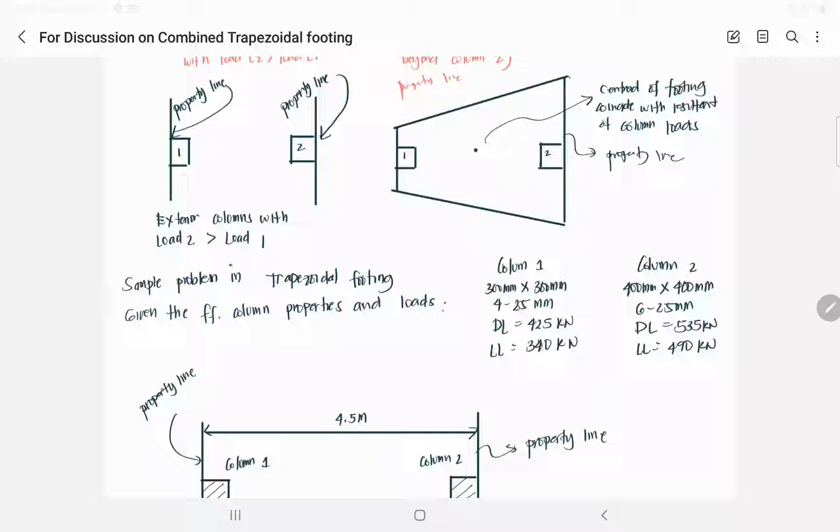This is Engineer Atilano, and today I will discuss a sample problem in trapezoidal combined footing.

Before going to that problem, just a quick recap on combined footing. Combined footings support more than one column, and this happens when the columns are close together so that the isolated or individual footings would run into each other.

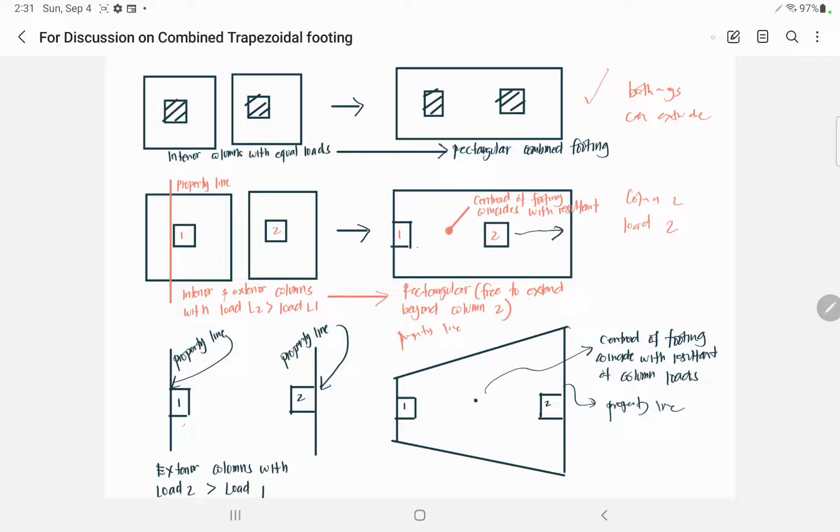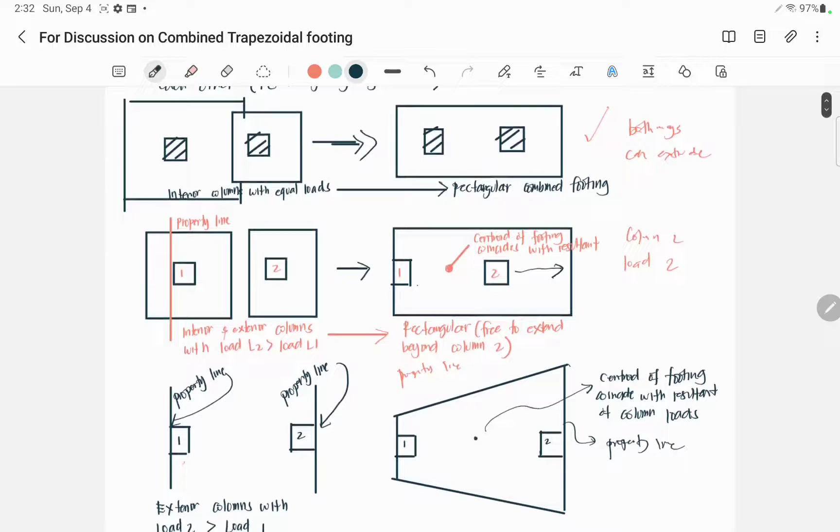For example, if you have two isolated footings and based on the design the distance between them is so close that they intersect each other, you can proceed into a rectangular combined footing. Another instance where rectangular footing is used is when this column design already causes the footings to intersect, so we can create a rectangular combined footing.

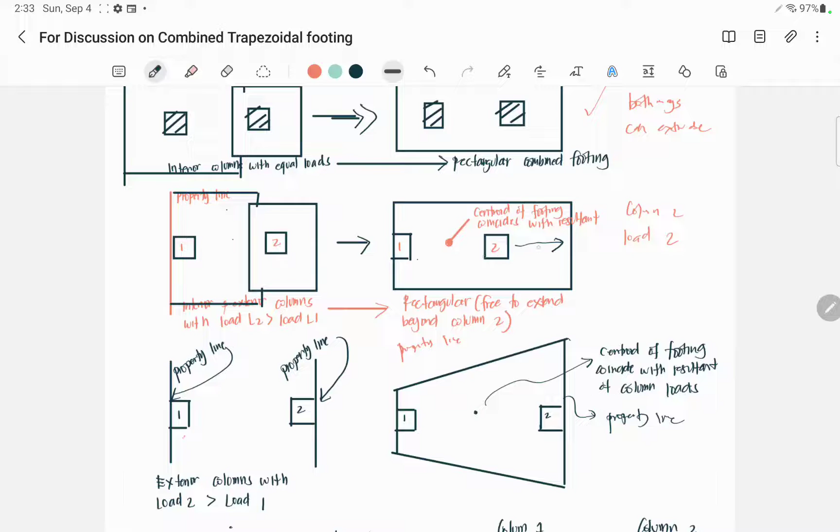There is also another scenario where the column is just beside the property line. In this case, you assume that they overlap, so again you need to combine it. But since in column 1 you cannot extend, you will just extend the area in column 2.

The last scenario is where the two columns are within the property line, and the assumption is that column load 2 is greater than column load 1, so it's concluded that the footing in column 2 is larger than in column 1. If you are provided with a property line, you cannot extend in that direction, so what you can do is extend in the other direction. That's why the most appropriate section will be the trapezoidal combined footing, with load 2 greater than load 1.

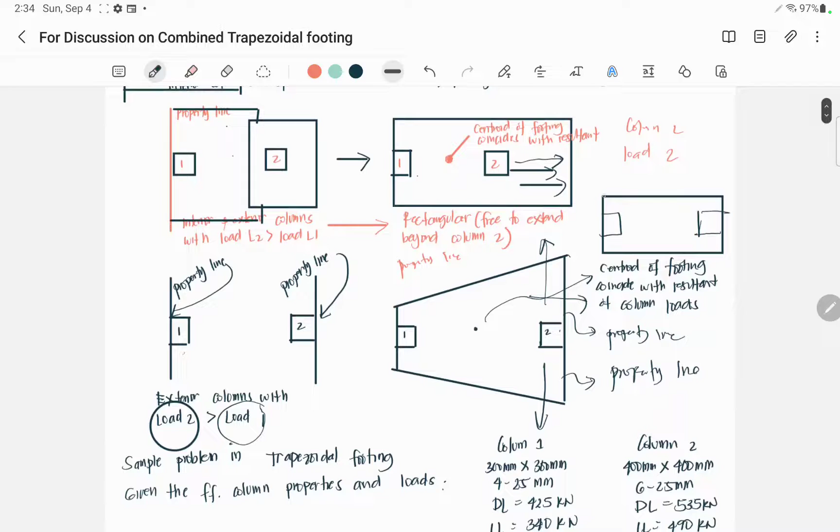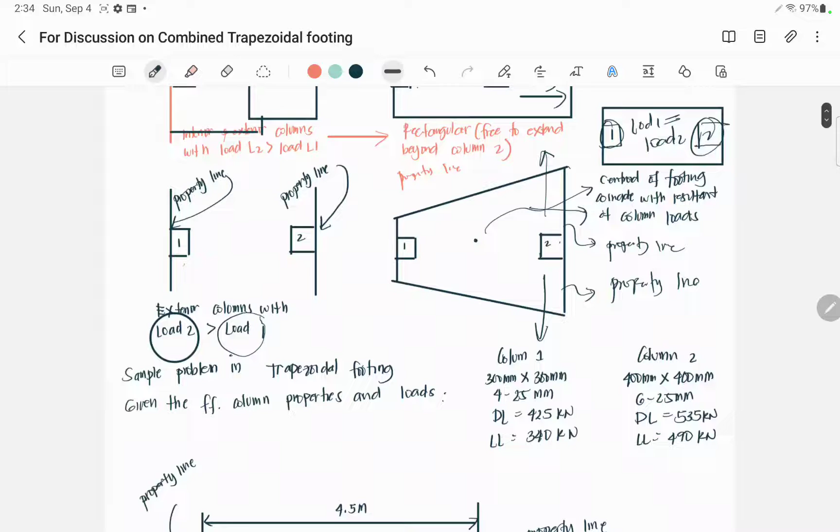Sir, what if load 1 and load 2 are equal? If that happens, it will be a rectangular combined footing. So you have the column, you have the column, when load 1 is equal to load 2. But in this other case, load 2 is greater than load 1. So if load 1 is greater than load 2, it's the reverse of the drawing, it will look like this.

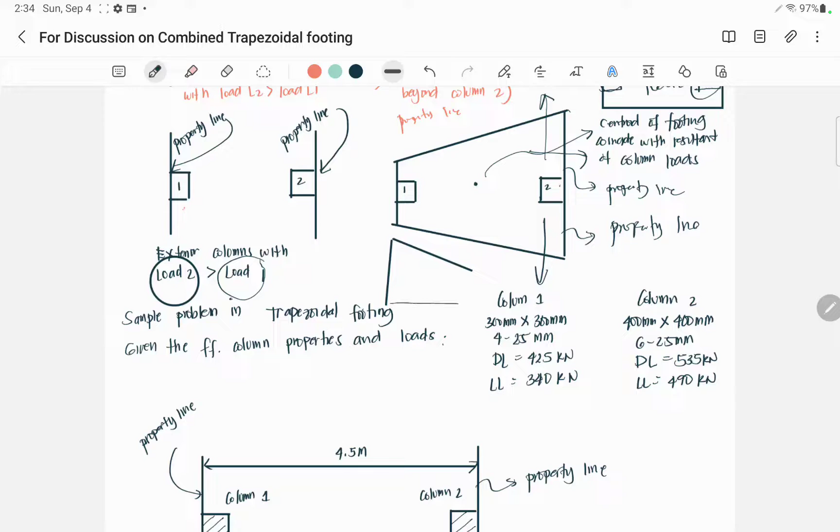Okay, let's try to solve this problem. It is assumed that the two columns are located within the property line, and we can say that column 2 has a load greater than column 1. So 535 and 425, there is a difference of 110 kilonewton, which is very big.

There is also a 150 kilonewton difference in the live load. So we will design it in such a way that we identify the section and the reinforcement both for the top and bottom section. The problem here is to design a suitable trapezoidal shape footing, with Fc prime of 21 megapascal, Fy of 414 megapascal, and the effective soil pressure already given.

QE means you will not determine it. Based on our previous problem, we have QA, the allowable, and you need to deduct the pressure coming from the soil and from the concrete, but now it's effective. Use 20 mm main bars and 16 mm temperature bars with Fy as 275, and we already have the value of D, which is 680 mm.

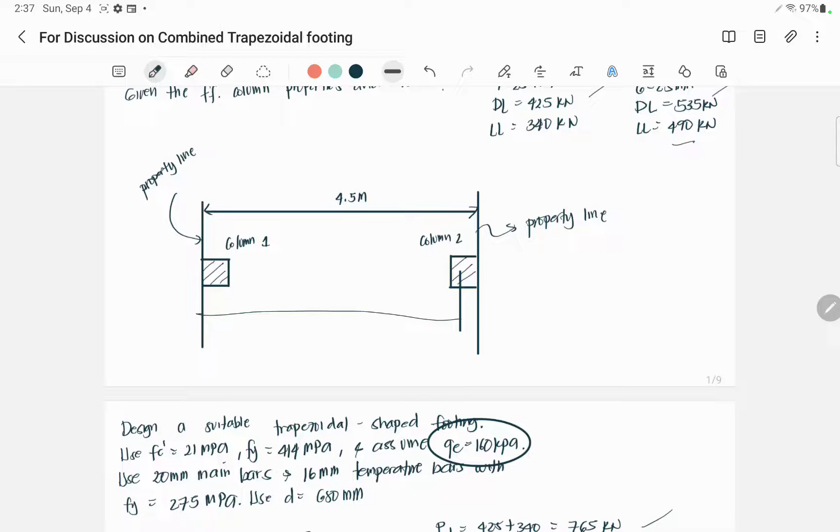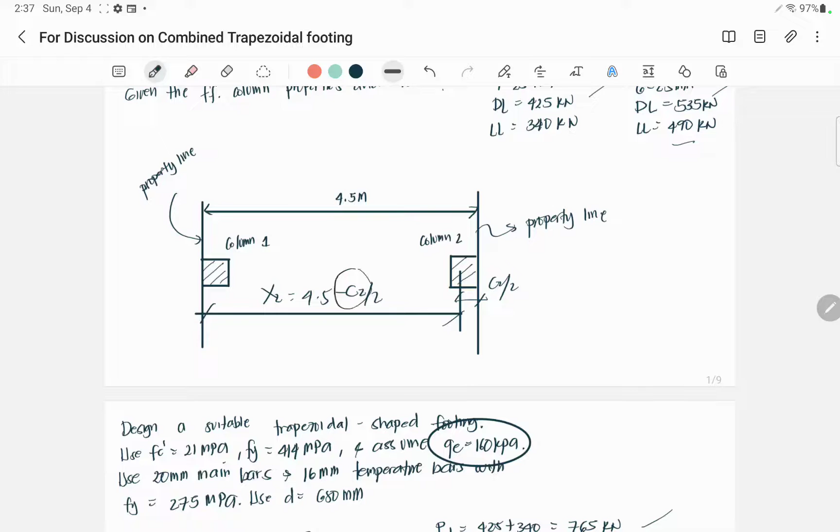Then P2 is the service load at P2, so we just add to get 1025. And X2 is this one, which is 4.5 minus half of C2 divided by 2, where column is 0.4. So X2 will be 4.5 minus 0.4/2, which is 0.2, giving 4.3.

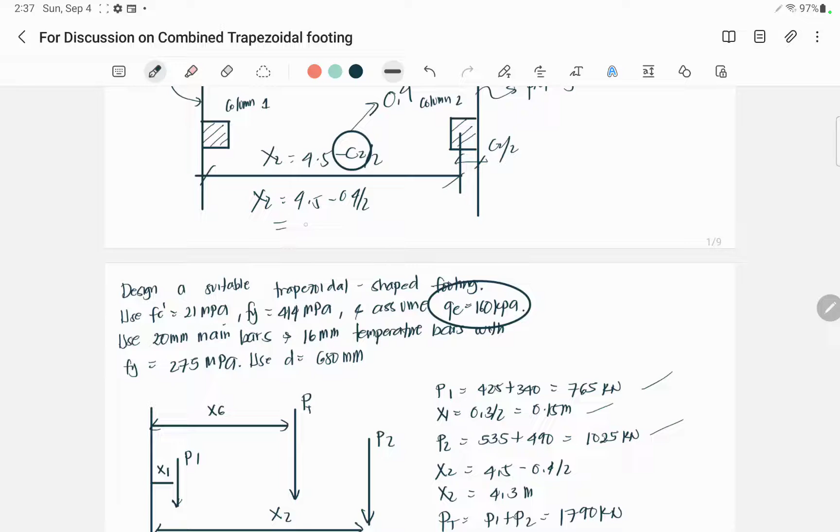Okay, so correct, 4.3. Then we add the total, which is 1790, and based on the figure, the area of footing is 1/2 (A plus B) times L, which L is 4.5. We will use that area to come up with the section or dimension of A and B.

Your value of PT will be multiplied with the XG, so we are utilizing Varignon's theorem. Your XG, or the location of the centroid of the footing, is 2.526 from the left property line. This XG will be used to determine the area.

By the way, we have the area of footing. So P service over QE, QE is given, so 1790, the total, divided by QE, gives you 11.1875 square meters. So this is the area of the trapezoid. You have here two unknowns, two equations.

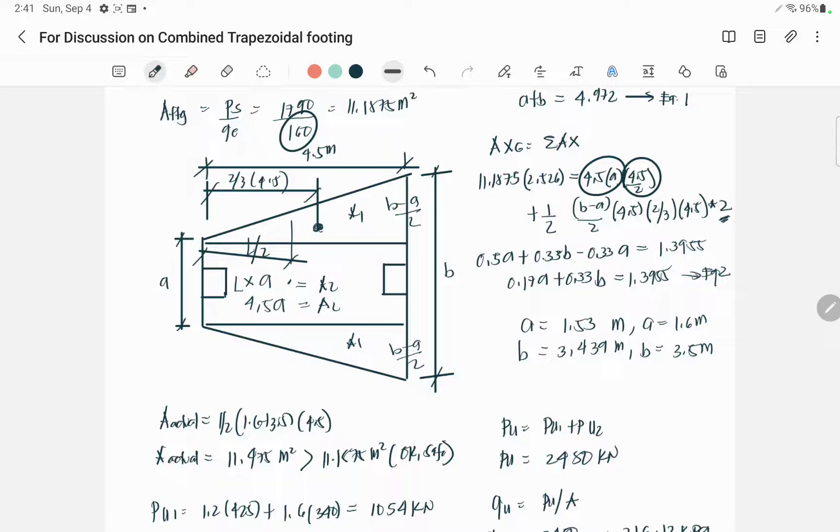Assume that this is the centroid, 2/3 of 4.5. That will give you 2/3 times 4.5, multiplied by 2 because you have area 2 and area 1. Then using algebra, you have the simplified equation 2, which is 0.17a plus 0.33b equals 1.3955.

We equate this equation 2 to equation 1. From that, we have A which is 1.53, so we can say A is 1.6 and B is 3.439, which is 3.5 meters.

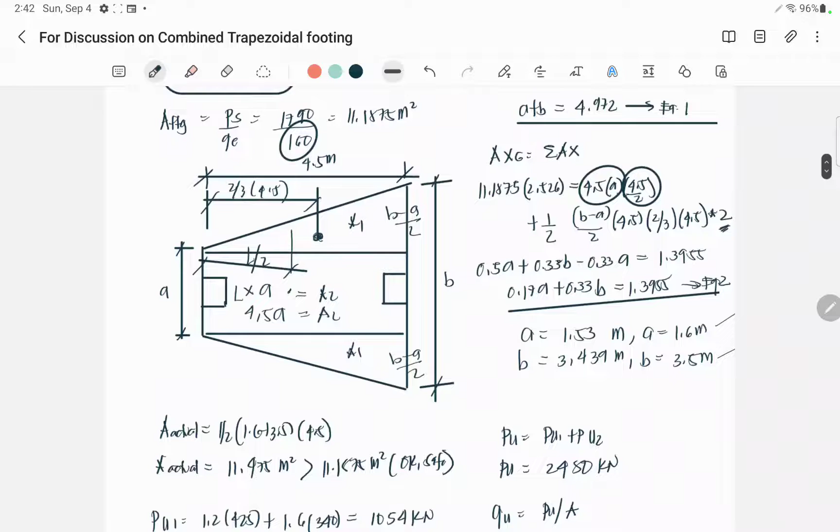Now, based on the design section, you can calculate whether you are above, based on the computed one, whether the new section is adequate. Since area of footing is 11.1875, based on the new dimension of A and B, we should be greater than 11.1875. So, accordingly, 1/2 times (A plus B) times L is 11.475, and we are greater than 11.1875 square meters. So, we are safe.

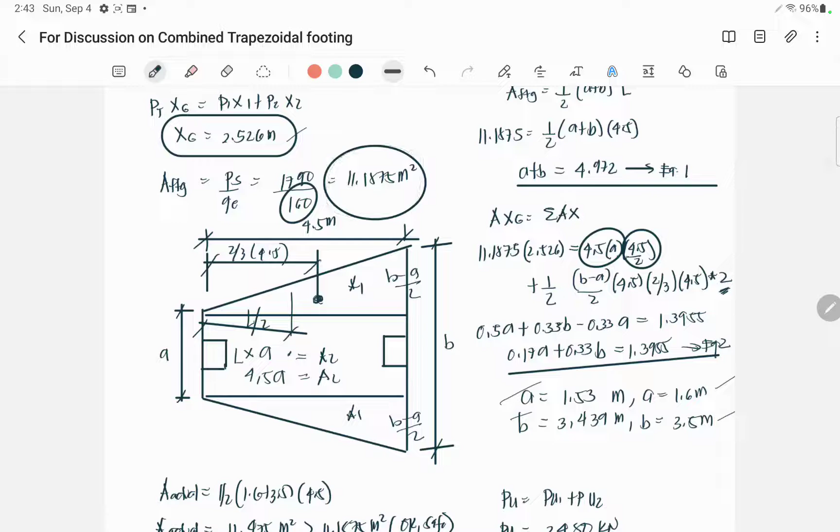So after determining the section and comparing to the required, the required is 11.1875 square meters, and we are above that based on the calculated one. We can now proceed with the uniform distributed load to determine the shear and moment.

First you determine PU1, the ultimate, it's 1054, PU2 is 1426. Then we add, it's 2480 kilonewton, and we divide by the area, which is 11.475. So you have the ultimate pressure, which is 216.12 kPa.

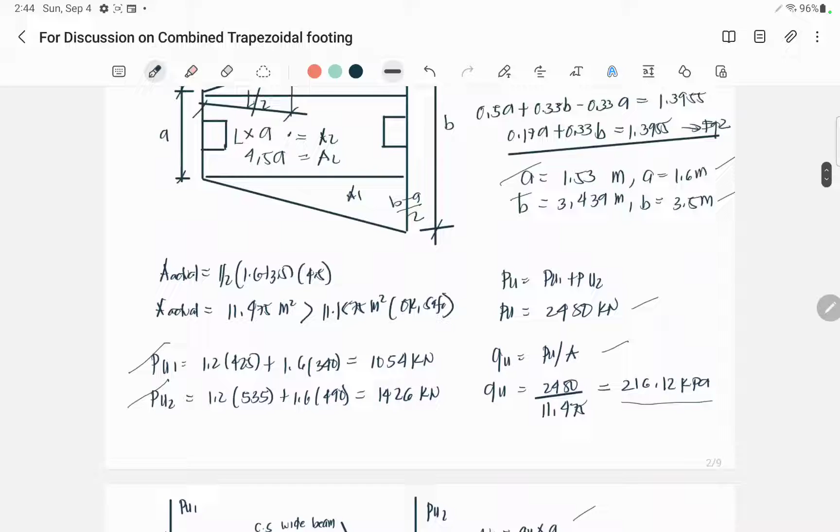Then that is the pressure. So to determine the distributed load in terms of kilonewton per meter at column 1, we multiply by the value of A, to make it a unit of kilonewton per meter. So it becomes 345.79 kilonewton per meter.

And for the uniform load at column 2, we multiply by the value of B. It becomes 756.42 kilonewton per meter. So, accordingly, we have now the pressure diagram, omega 1 and omega 2.

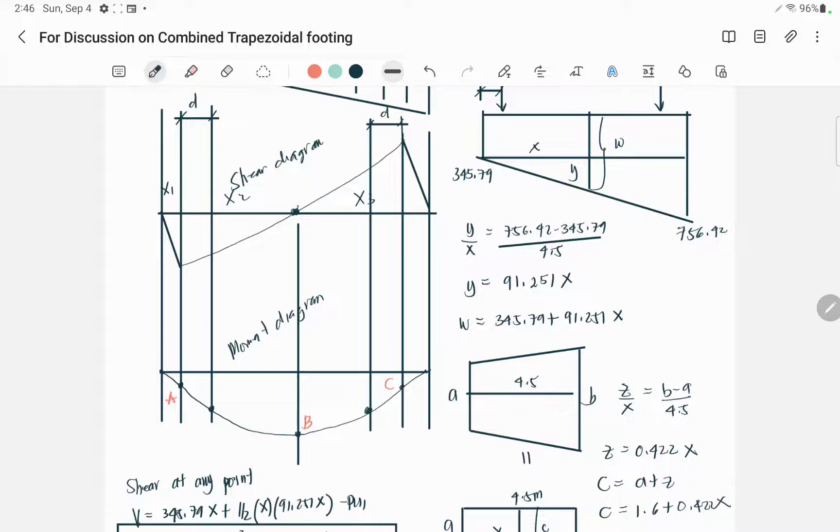Okay, and also this one, this is the point of inflection, wherein you get the first derivative of the moment and equate to 0 to determine the point of inflection. Okay, so what we will do now is create a certain shear and moment equation.

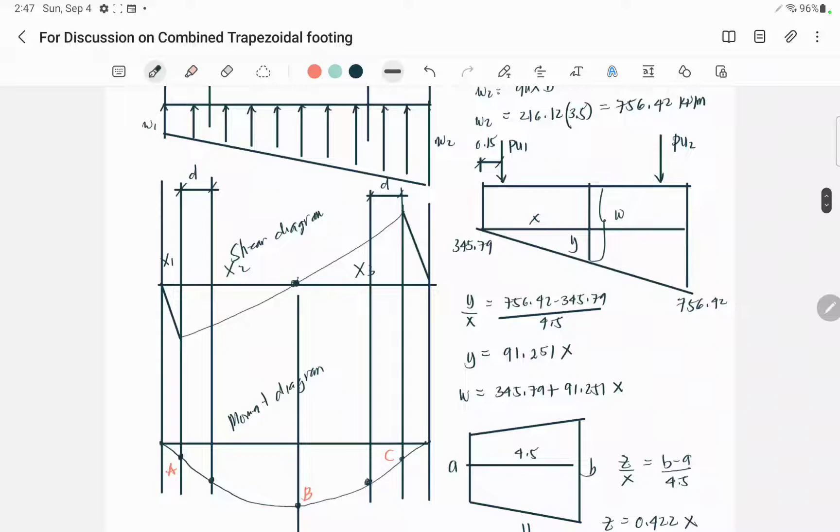So to determine that, the procedure I have done is I cut a certain section to create the equation. So this is w1, right? This is w2. You have PU1, you have PU2.

So let's say this is w, right? So this w is actually the value of 345.79 plus the value of y. So actually, when you cut at that section, that will be the equivalent of w. And to get the value of y, it's a ratio and proportion.

So y over x is equal to the difference of 756 and 345 divided by the length, which is 4.5. So this one is actually the total length L. So y is 91.251x. Therefore your w is 345.79 plus 91.251x. Okay? So now your shear at any point.

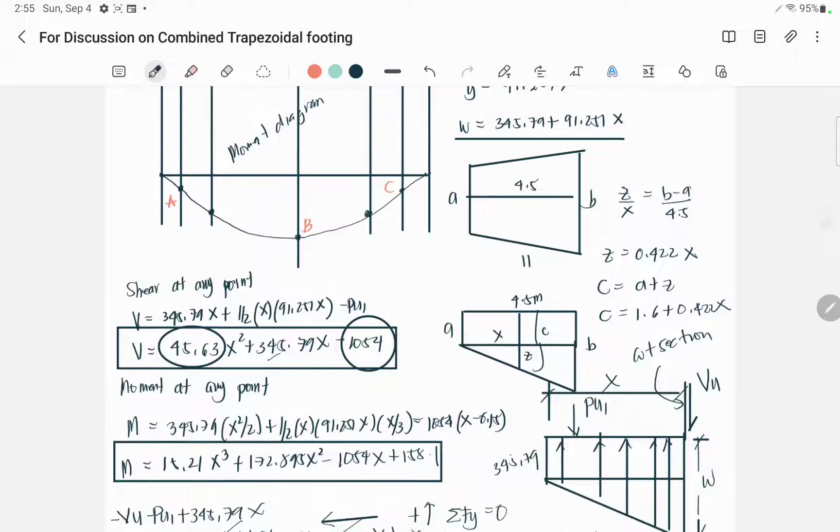What else? How about the moment at any point? So this is already our shear at any point, and this equation will be used to draw the diagram. But of course, I just draw it directly because I already knew the drawing. If you are familiar with the problem, you can draw it directly, but if you do not know the value, the configuration alone, you can imagine it.

Then how about for MU? It's the same procedure, same as cut section. But this time, you will take summation of moment at this point.

Okay, so I don't have space to write anymore, so I will just erase this one for the moment diagram. For the moment equation, I will erase. Where is the eraser? So, the same.

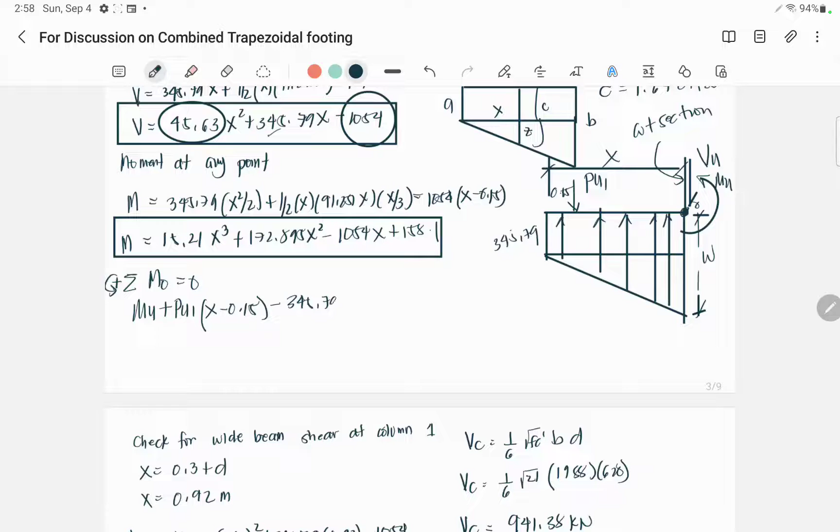MU, it's the same. So MU, summation of moment at, let's say, point O, is 0, and this direction will be positive. So MU plus PU1 times, this is 0.15, right, X minus 0.15, then minus

345.79 times x, times the distance x over 2, minus 1/2 times x times this one, which is already 91.251, right? So 1/2 x times 91.251x times the centroid. What is the centroid? X, 1/3 of x, is equal to 0.

So your MU now will become 345.79 x squared over 2 plus 1/2 x times 91.251 x squared over 3 minus 1054 times x minus 0.15. Okay, and of course you simplify it and this will be the value. So 15.21, diba? So can I solve again? Baka nagkamali ako.

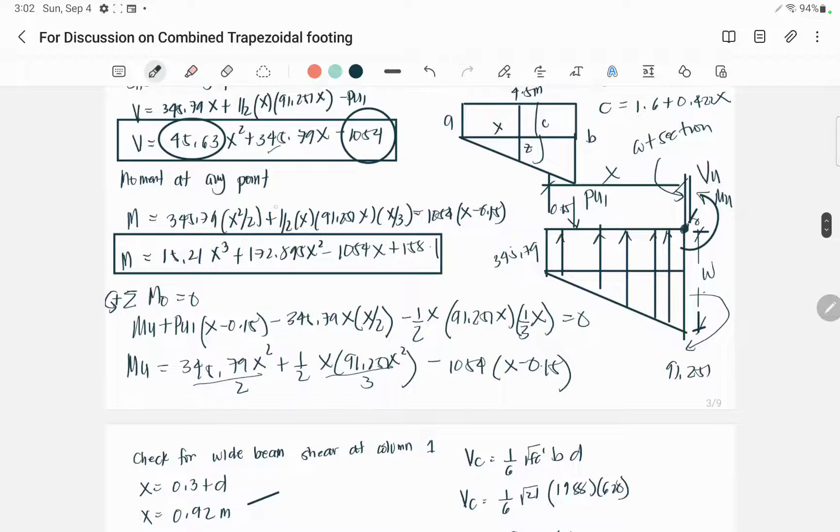That's why it's 0.3 plus D, so X is 0.92. So to determine the value of shear, the critical section for shear, we all knew that this location is 0.3 plus D, which is 0.92. So we will put this 0.92 in our shear equation, which will give us negative 697.252.

By the way, this shear signifies only the direction, no? So we can compare, we will do the absolute value. This is already the actual, and this VC is the capacity. Since VC, which is 941.38, is greater than 697, we are okay, and the value of D is safe for wide beam shear at column 1.

How about check for beam shear at column 2? For the location of this one, we all know that the total length is 4.5, then deduct the value of D and C2. So it will become 4.5 minus D minus C2, which is 0.4. So the value of X will be 4.5 minus C2 minus D, which is 3.48.

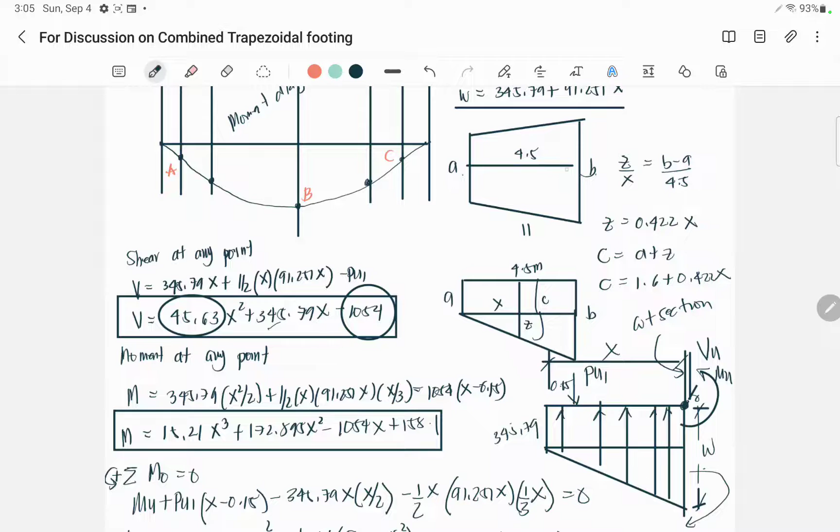Originally the section is A, B, and 4.5. This is the same if we extend this big downward, and we make it straight at the upper part. From this section, that's why I put equals here to become like this. And of course the value of C is A plus Z. A plus Z, and Z is 0.422 times X.

The same is true for this one, no? So 1.6 plus 0.422 times X. X is 0.92, you substitute this one with this one. So it becomes 1.988.

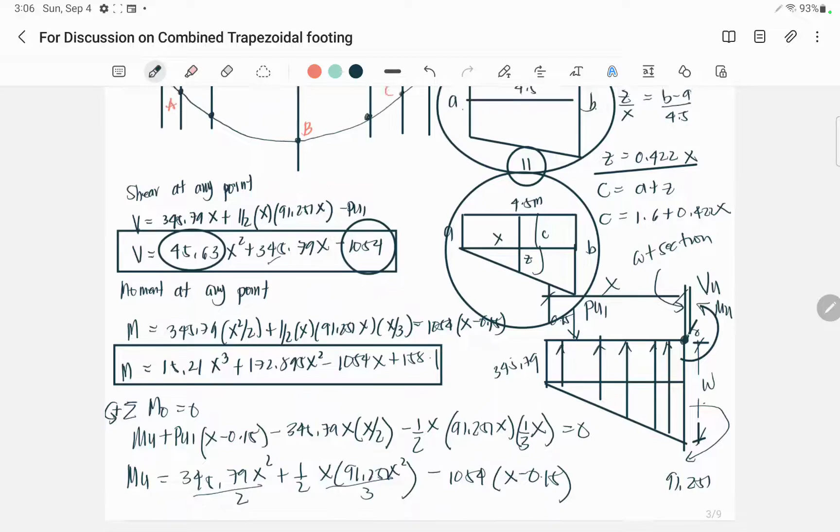Why are we calculating that value of C? This value of C will become the value of B in the calculation. Because the formula VC is 1/6 square root of FC prime, times D. So the value of width at that X section, because we try to create a certain equation, that value of C, 1.6 plus 0.422, will become the width B.

This is top view, ah. Okay sir, we are just a little bit confused. Okay lang naman, okay?

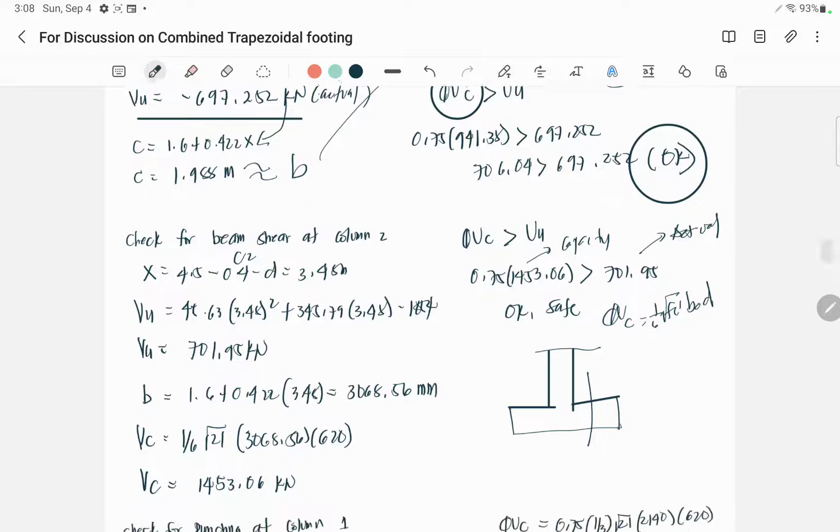So remember, no? When we are designing a shear, for example, isolated footing. When we determine the value of shear, the formula of Vc is 1/6 square root of FC prime, Bo, D. So we have, if this is the bar, so this is the D, and this is the value of B. That is the value of B.

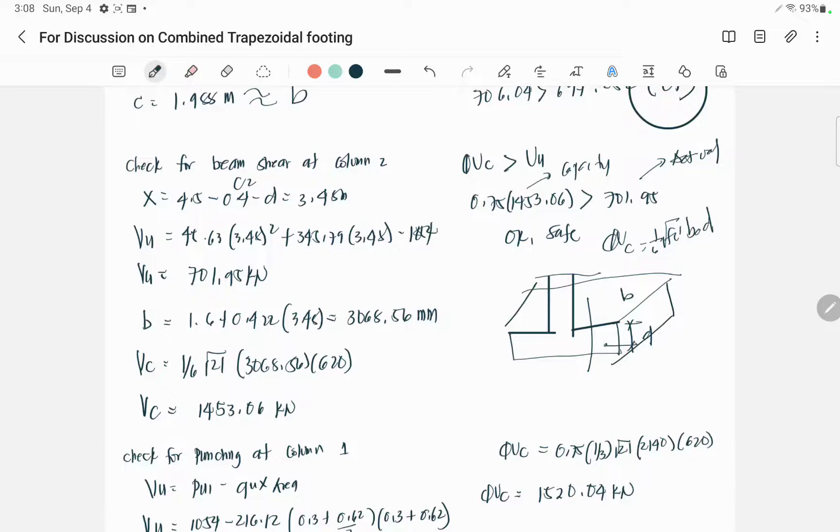Now we have a trapezoid, and this is the value of B, Bo. And this is the value of A, this is the value of B. How to determine this Bo? Instead of this one, we convert the drawing into like this. This is A, this is B. We are on the top view, on the top view.

So this Bo is actually located at X distance. And this Bo, in my computation, I put it at C. Right? Siya yung C. So actually, this is the value of C. But we convert into this one so that we can determine easily the value of C. And C is actually A plus Z, where Z, by using ratio and proportion, is 0.422x. Okay? We are on the top view, diba? We are on the top view.

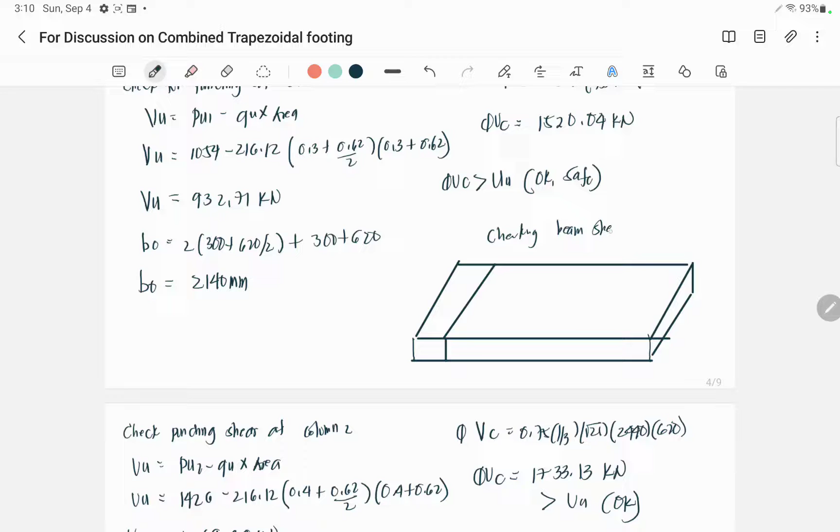The value of Vc is 1/6 square root of FC prime times BO times D. This is BO, and this is the value of D. Okay? In the same manner...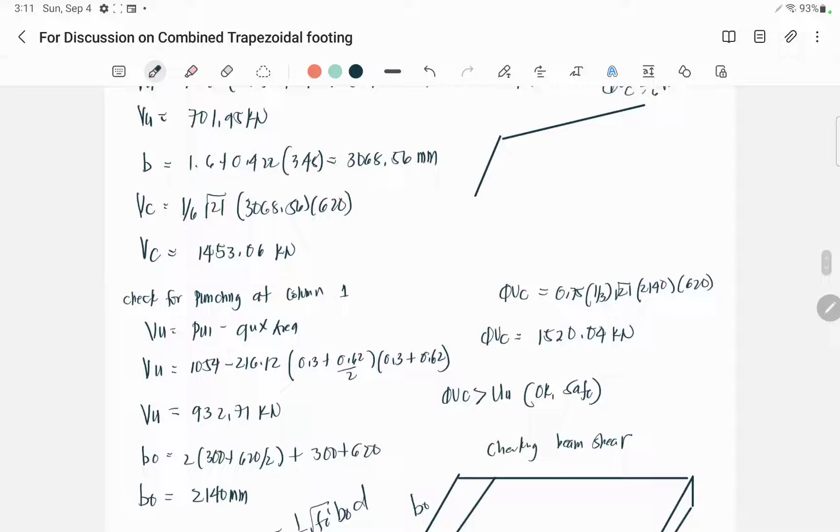If you have the trapezoidal, right, we want to determine this value of BO. Right? And this is the value of D.

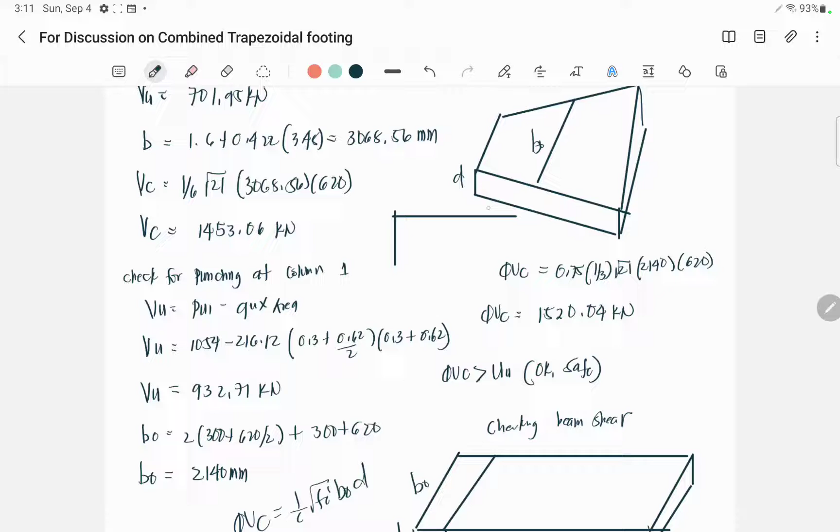So, instead of doing that one, we convert the drawing into like that. So, this is the value of B, or this is equal to BO. Okay?

So, which is this one, B. B is X plus, B is A plus Z. This is A plus Z, where Z is 0.422X. Okay? I hope you understand that one, no?

If you're still confused, we can have the discussion on that. So, we already determined the value of B, and we are safe for the beam shear. Now, check for punching shear at column 1.

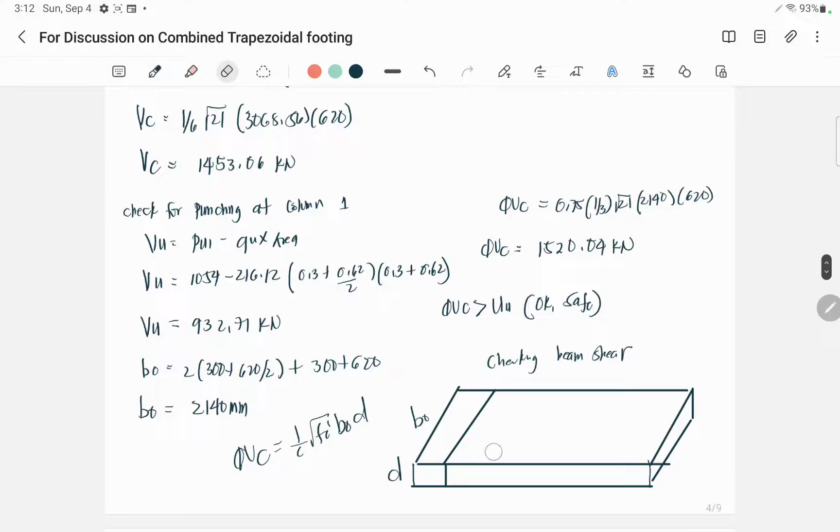Check punching at column 1. So, for punching, it's PU1 minus QU times the area. I don't have the drawing. Okay. So, where is that?

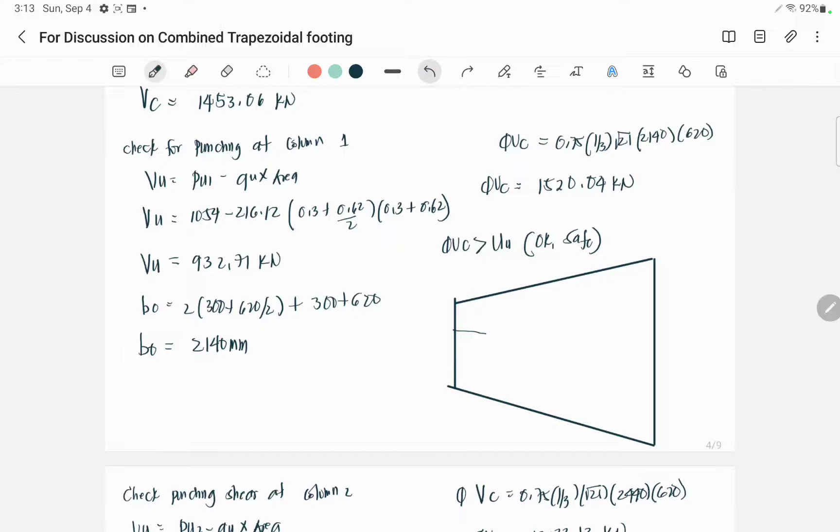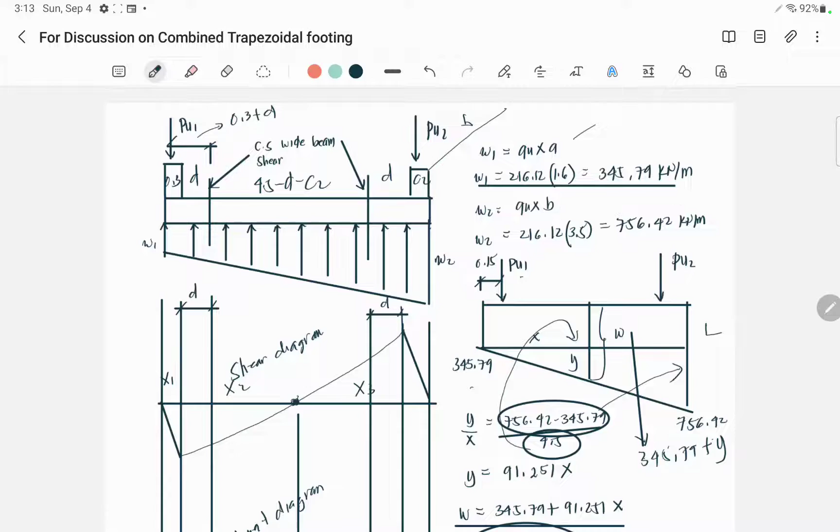So QU is, we have the value of QU here, right? 216.12. Where is 216.12? Wait. Yeah, the value of the QU is 216.12 kPa. So it is expressed in pressure.

So we need to multiply that one with the area, no? With the area. So remember, our area here is this... D over 2.

That's why your net area will be the total area, which is, if this is C, it will be C plus D over 2 multiplied by C plus D over 2 plus D over 2 minus the column C times C.

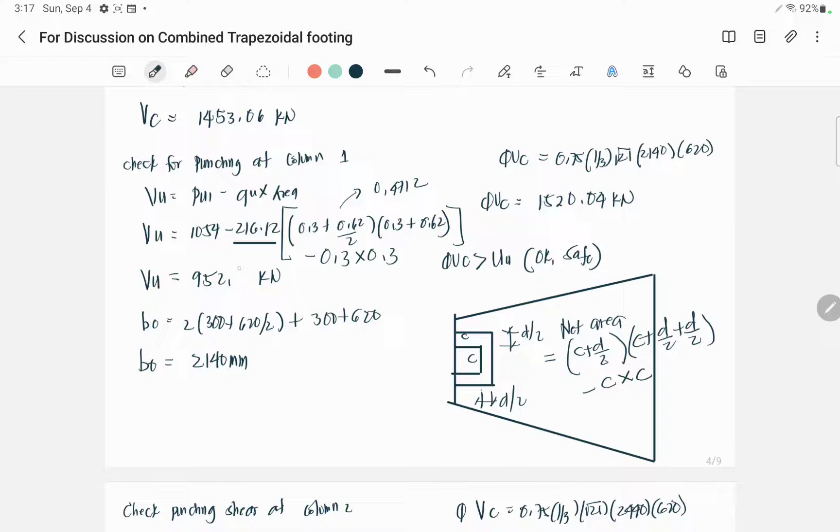Okay, and we check the value of phi VC. So phi VC is 1/3 square root of FC prime times BO times D. Okay, but this BO is the perimeter of the punching, right? The same with all the columns that we design.

So your BO is actually 2 times C plus D over 2, plus D plus C over 2 plus C over 2, right? So 2 times this side. This is C plus D over 2, 2 times, plus D over 2, sorry, D over 2 plus C plus D over 2. So BO is...

2140, and of course we substitute. Our phi VC is 1520. This is our capacity, which is greater than the actual. Okay, so the value of D is safe for punching at column 1.

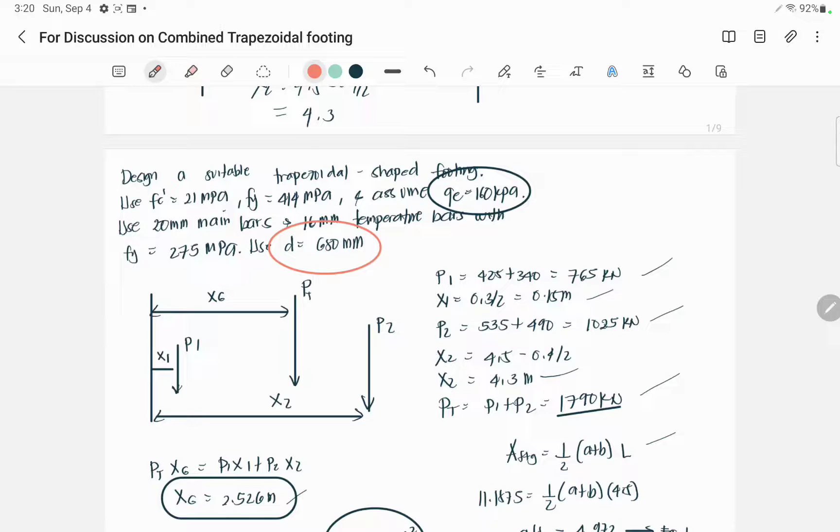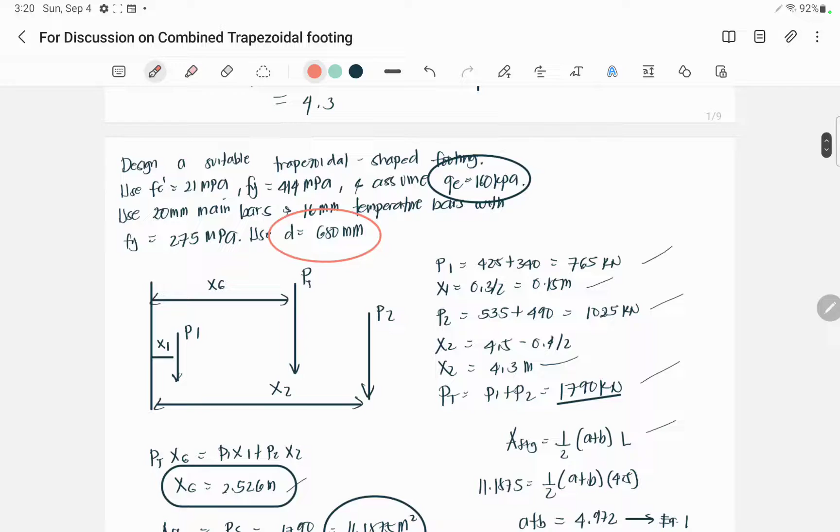So the value of D provided based on the given, this one is safe for both the one way, for both beam shear and for the punching shear. Okay, so what if it did not pass? So we can increase the value of D. Okay, so now we are ready for the reinforcement.

So the longitudinal reinforcement, so yeah, we have now the MU2, the MU1, MU2, and you have the Mmax or the maximum. So where is that? So you have here MU1, no? Then you have also MU2. Actually, where is MU1? This is...

MU1, eh. MU1, yan. Then, sorry guys, ha.

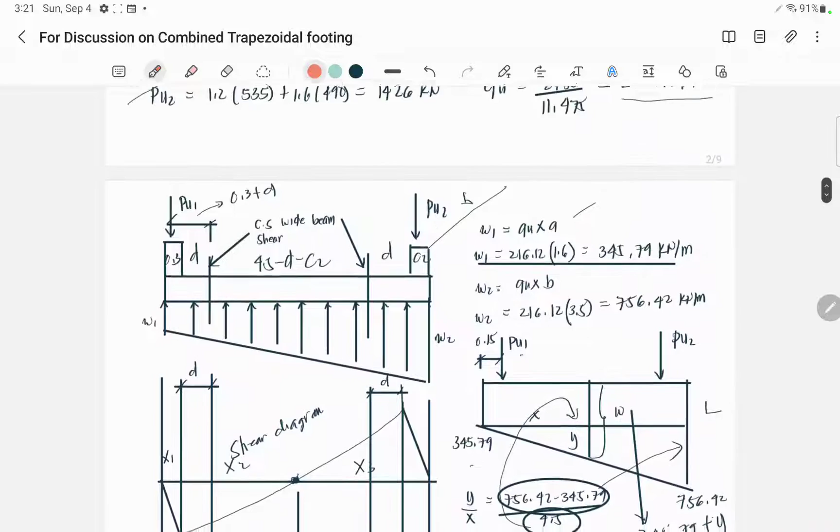MU2 is located here. MU2 is 4.5 minus 0.4, where 4.5 is the whole length minus 0.4. So this is your MU2, and this is the Mmax.

Based on the figure, based on the moment diagram, all the moments are negative, which means the requirement of the bar is top bar only, because it's negative moment. But in the bottom bar, as I mentioned before, we will use the minimum reinforcement. That is the additional.

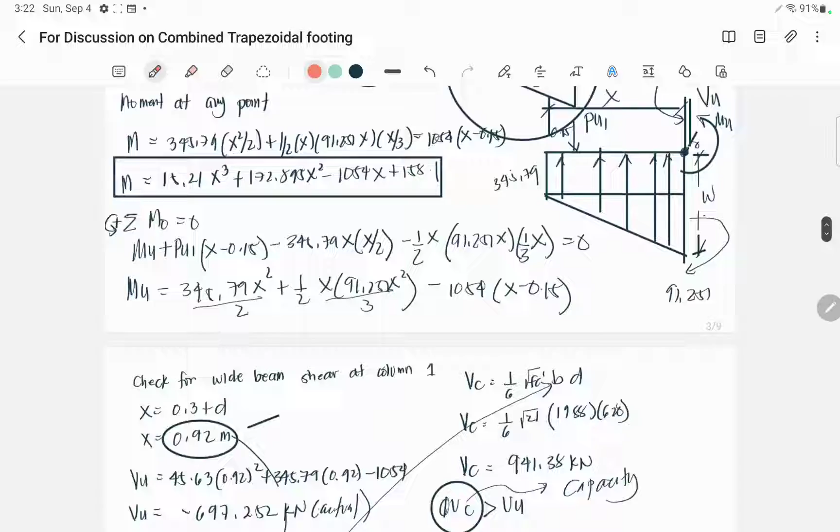So we already have the moment MU1, MU2, and the maximum moment. How did I get the maximum moment? The maximum moment is the point of zero shear. So we have the moment and shear equations.

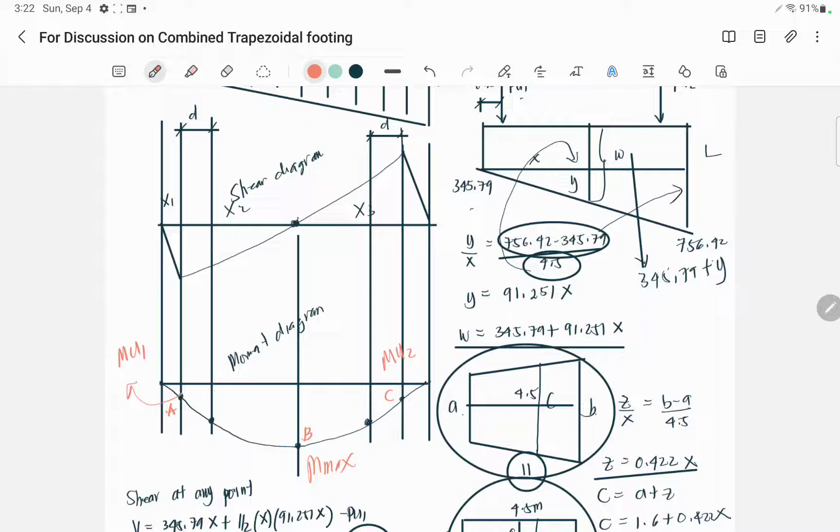So we put 0 in the shear equation to determine the location of that point. When we let the point of zero shear determine the maximum moment, we get the point of zero shear, which is found to be 2.33.

Putting that 2.33 into the moment equation, you get 1166.69, negative, which means the bar that you will put on that section will be the top bar.

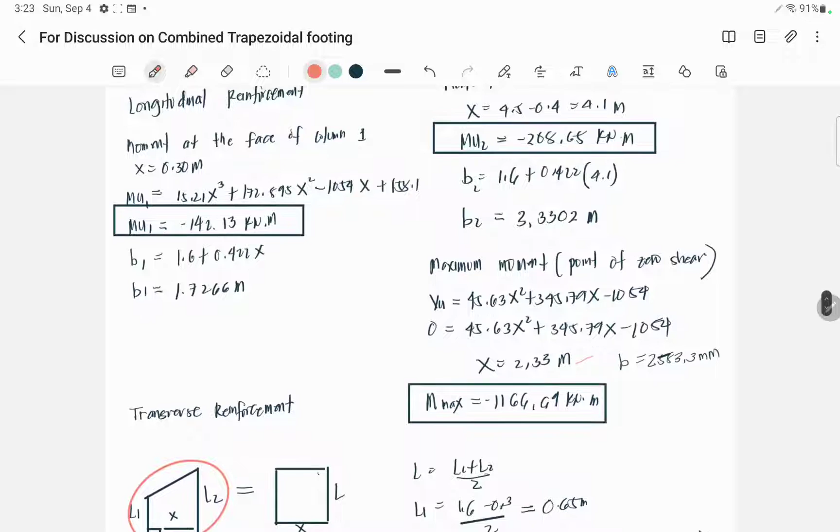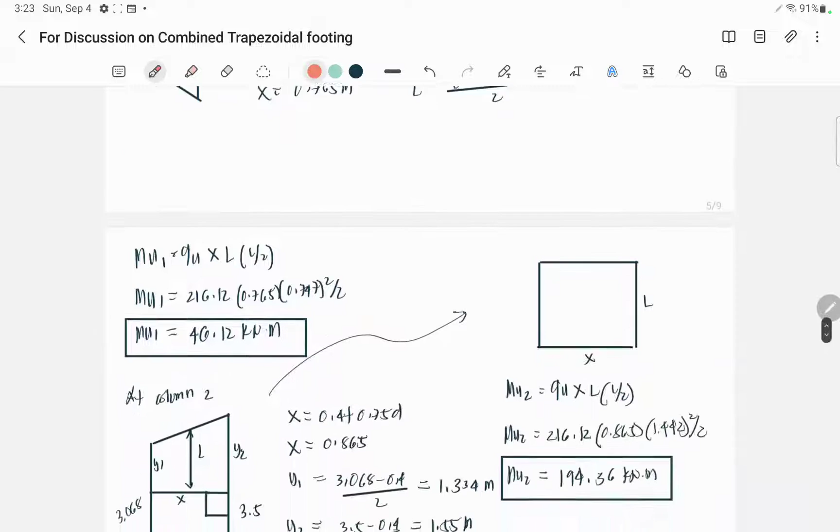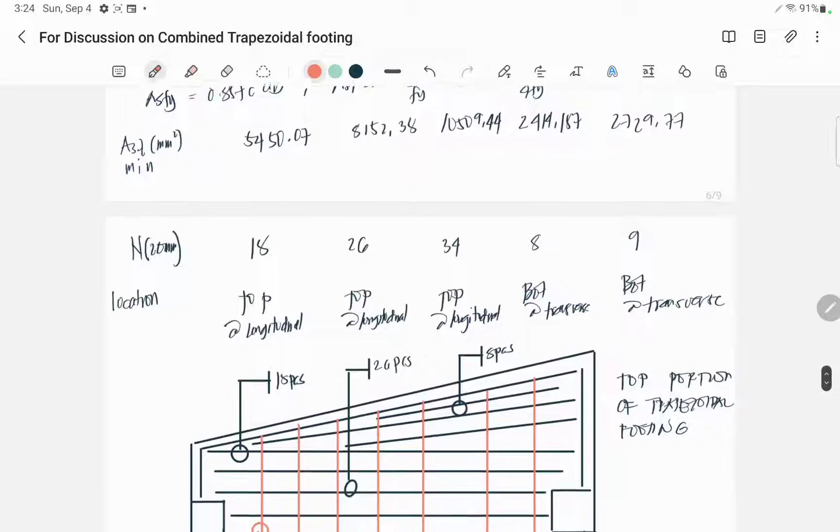So we are done with MU1, MU2, and the maximum moment. Now, for the transverse reinforcement, we will determine this bar. The same is true with this one. Ideally, if you're already familiarized with the design, so if you already imagine what you are doing...

If this is the section... wait, make it bigger. If you already imagine what you are doing, since it is negative moment, the bar requirement is here. This is the bar requirement now.

Considering the longitudinal section, what we will put here is minimum only. In other words, this is the required top bar because of the negative moment. Based on the figure also, it did not mention that we should put the bottom bars, but for the minimum requirement, we will put area minimum here.

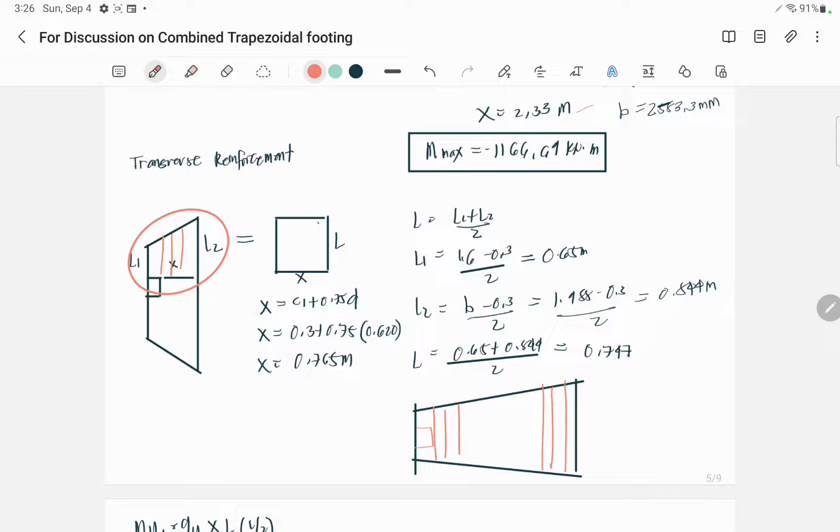Area minimum. So now, what we are designing now, we are done with the longitudinal, we are now in the transverse. So if this is the figure, what we are designing now is the bar here in the transverse. Ideally, we need to isolate a certain portion here, but it will be difficult for us to determine the moment. That's why we will convert this L1, L2, X into a rectangle.

So L1 plus L2 divided by 2 is simply L, and this is simply X. Of course, based on the designer's choice, the location of the critical section or the maximum moment can be from 0.5D to D, but in my design, I use 0.75D for this section only. That's why it will be C plus 0.75D, so it will be 0.765 meters.

And your L1 is 1.6 minus 0.3 divided by 2. How does this happen? This is the value of A. To get this L1: A plus L1 plus L1... L1 plus C plus L1 is equal to A. So if you want to determine the value, 2 L1 plus C is equal to A, so L1 is A minus C over 2. So L1 is 1.6 minus 0.3 over 2, which is 0.65.

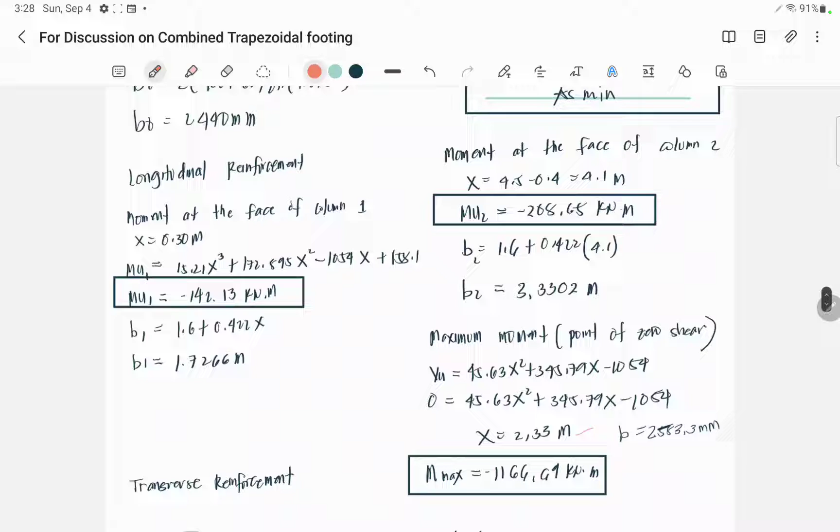How about L2? We all know that the value of B is 1.988. Wait, not B, it should be B prime. What is that B prime? It's 1988. Where did I get that 1988?

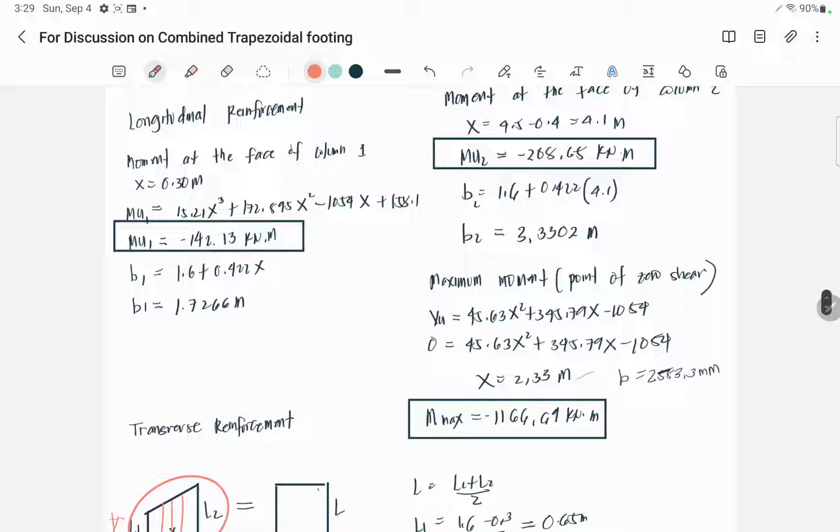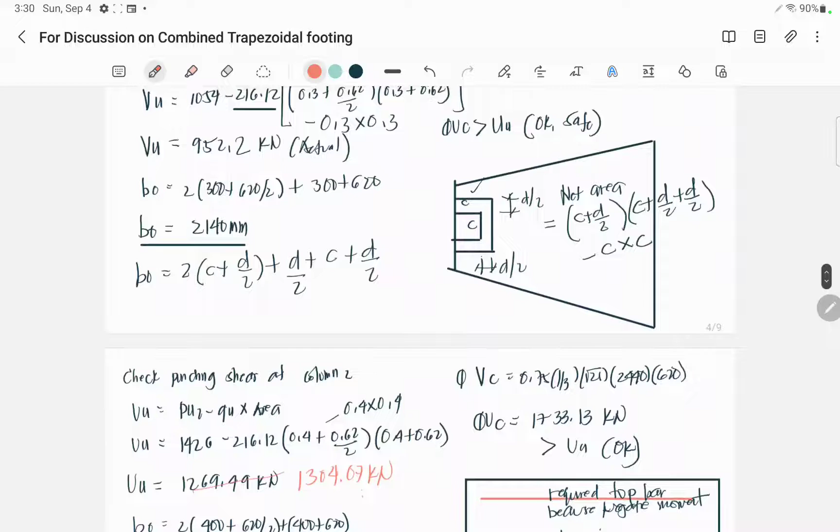So, this L2, where did I get L2, which is 1988? Wait guys, this one. Okay, we use C, we use 1988, which we say is this value: 1.6 plus 0.422x, so it's 1988.

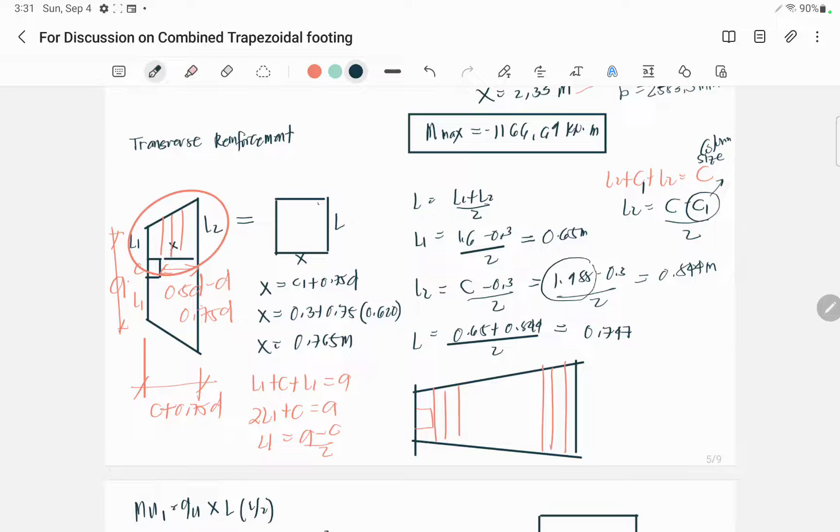So this is the value of L2. The value of L2 is the same: it will be L2 plus C1 plus L2 is equal to the value of C. So your L2 now is C minus C1, which is for the column size, divided by 2. So this C is 1988 minus 0.3, which is column 1, divided by 2.

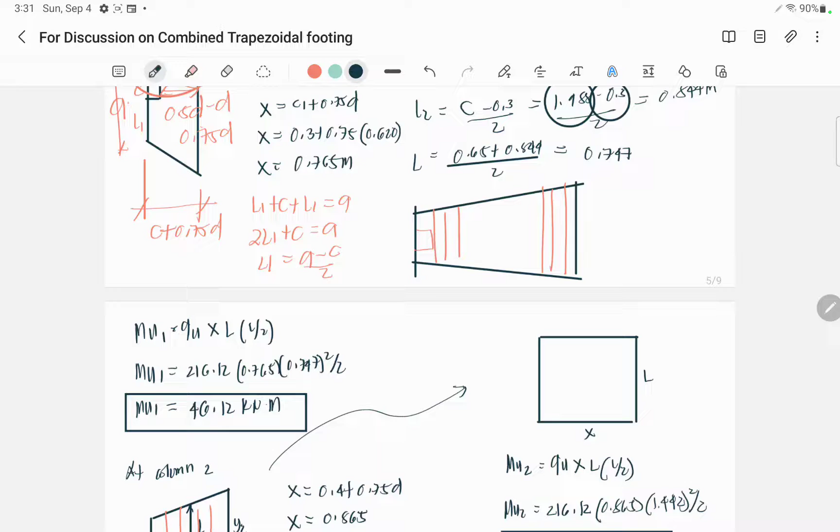So this is 0.844. So 0.65 plus 0.844 divided by 2 is 0.747. Now, we already convert that one. We can now determine the value of MU. So MU will be QU times L over 2.

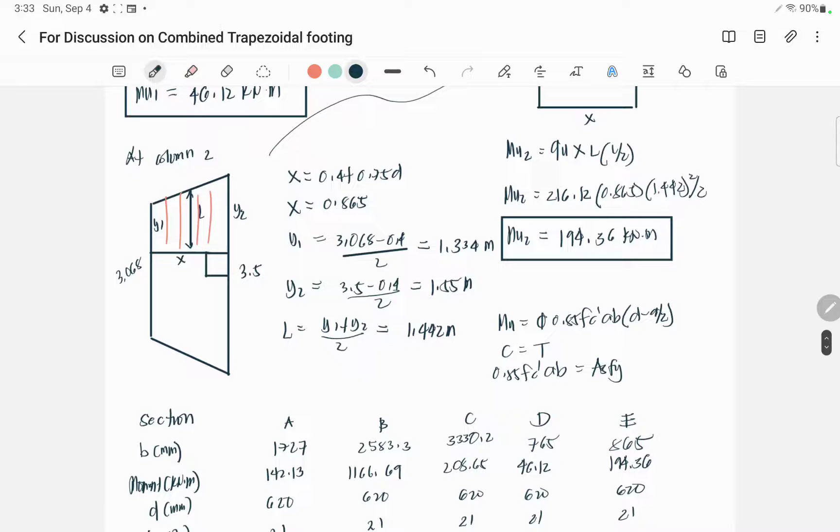MU times X, right? This is not multiply, this is X times L over 2. Okay, kasi QU is 216.12 kilonewton in pressure eh. So times X, this X, so QU multiply by X, right, times L over 2, because that is the moment we are computing here, located at L over 2. So MU1 is 46.12, and you just follow the same procedure with column 2. You will have 194.36 kilonewton meter. Okay, so from that,

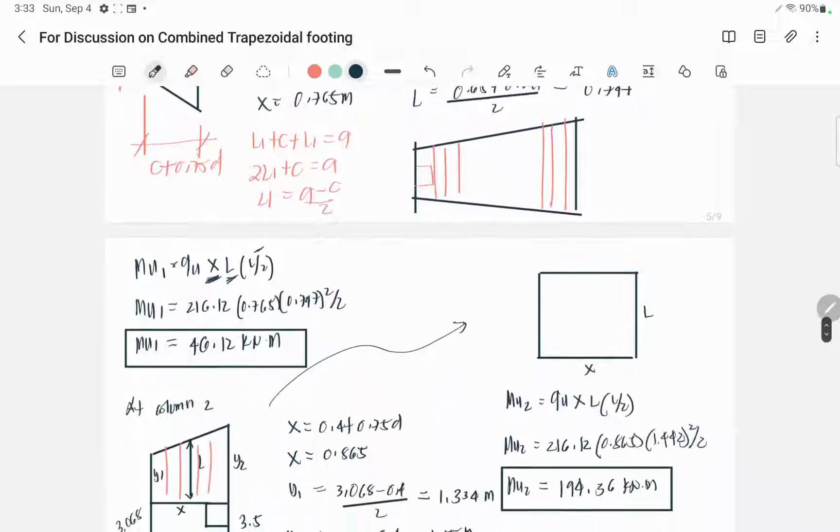ABC, so ABC is actually ABC, okay, and D is actually for MU1 at transverse direction. No, this is actually D, okay, and our E is this one. Okay, so from that, we calculate the value of A, and we calculate with the value of area is minimum, right? So accordingly, most of the area are all minimum. Right? It's all minimum, oh.

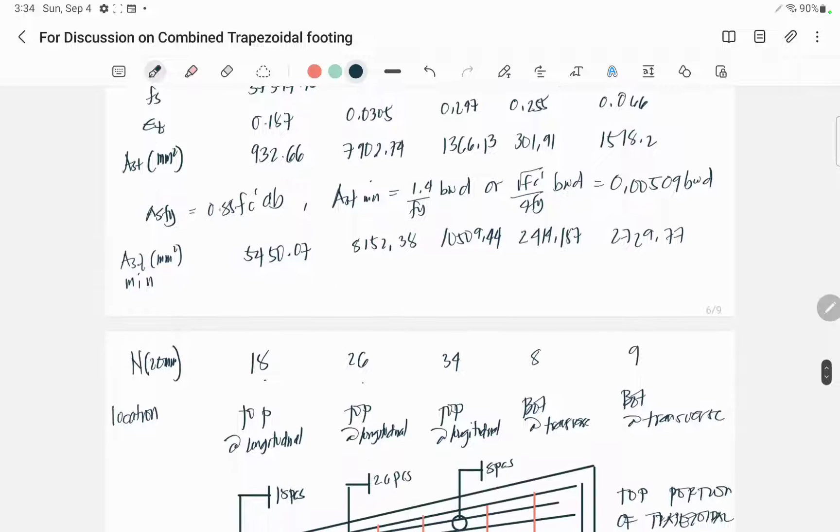So for ABC, which is the top bar, so it's 18, 26, 34. Why is it like that? Because it is trapezoid. As you go at the column 2 has a higher value of load, so it's assumed that it requires more reinforcement. Okay? And for the MU1, it's 8, and MU2 is 9. Okay? So what we have here is 18. Location is at the top, at the longitudinal, top at longitudinal. 8 is at the bottom at transverse. 9 is at bottom at transverse.

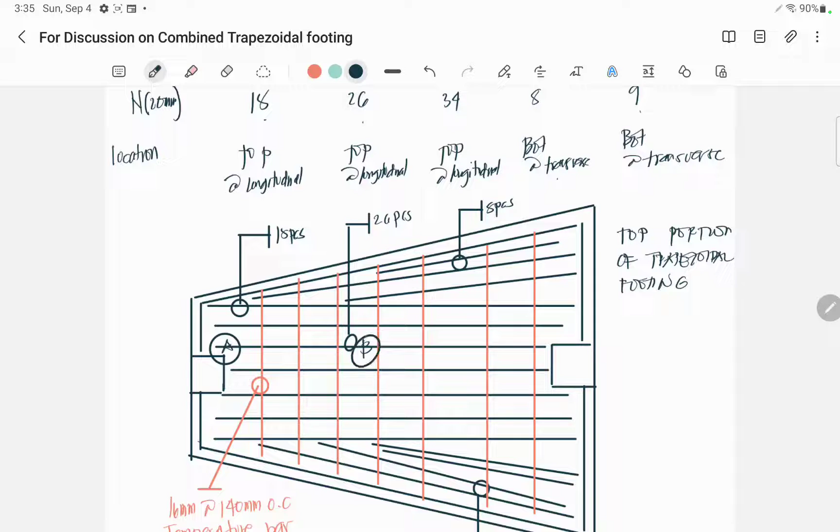So if we will draw the top bar only, so if we will draw the top portion, what we compute is at the M1, or simply the requirement located at this one. This is, I think, 1, right? Or we can say this is our A. It's 18 pieces, right? Then for this one, this is our B. It's 26. And at the last one, the requirement is all the bars here. The requirement is C, which it needs 34.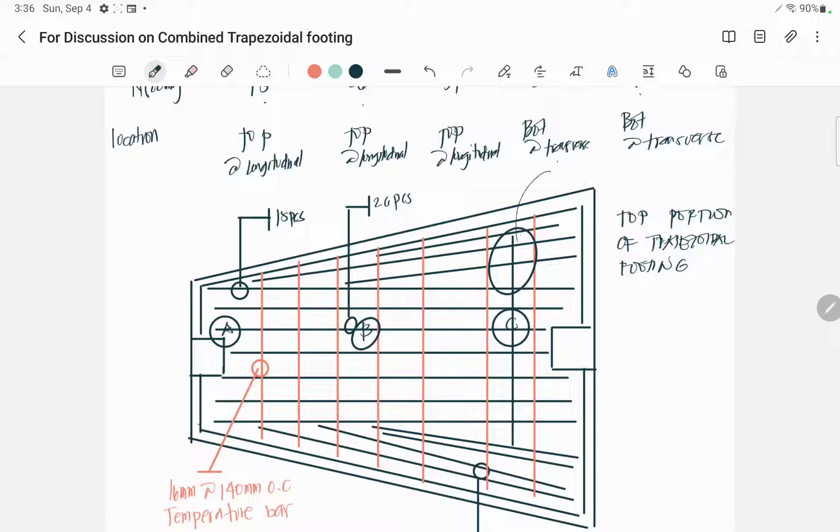That's why you have additional 8 here. What happened? Meaning 34 minus 18 is 16 divided by 2 is 8 pieces. So somewhere at point C, no, so somewhere here, no, you have additional of 8 pieces. Here also is 8 pieces. Then you have also the shrinkage bar.

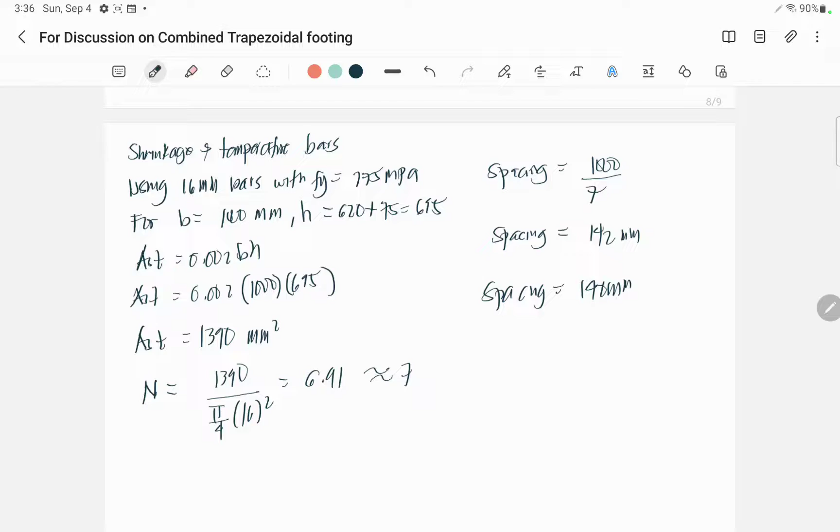Okay, so the shrinkage bar is, I compute this one, yeah, 0.002 BH for every 1 meter. So you divide by the area of 16 mm, 7 divided by 1000, 1000 divided by the number of bars, 140 mm. So it requires a temperature bars of 16 mm.

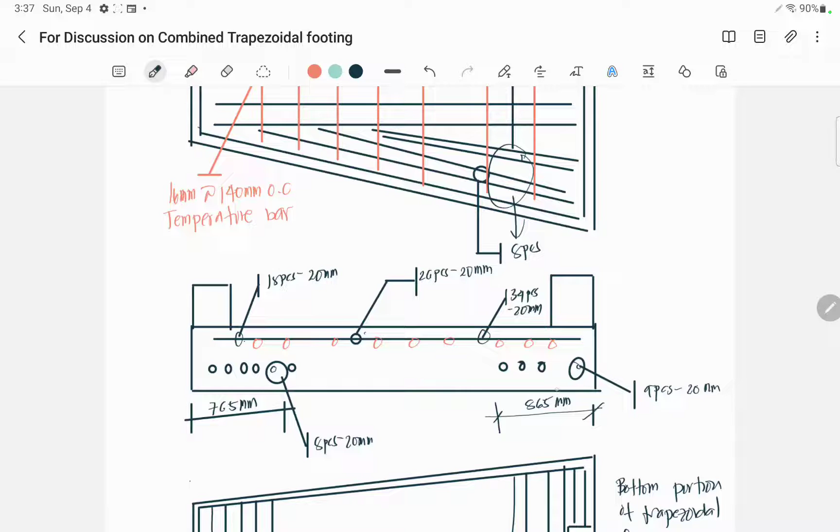So if we will check the side view for long direction, it needs here 18, 26 and 34 pieces. Okay? And at the bottom, it's 8 pieces in the transverse direction, and it's 9 pieces at the transverse direction located at the column 2. So the top view, it's like this. So this will be 8 pieces, and this one is 9 pieces.

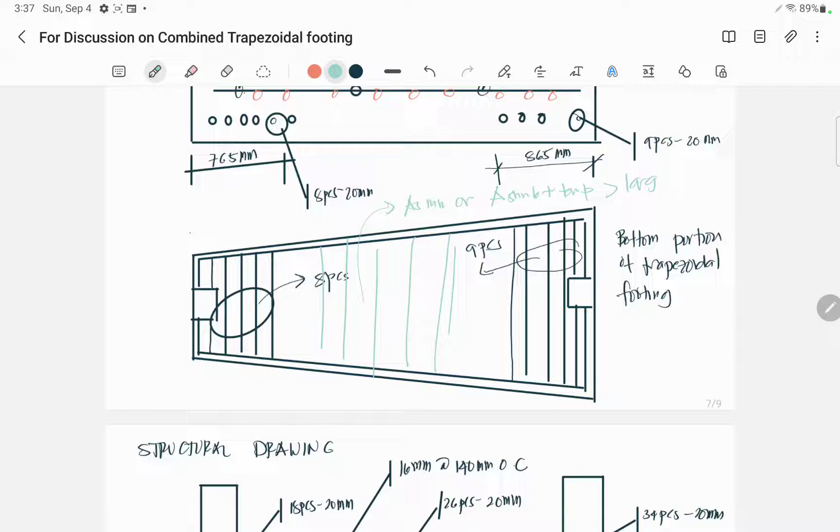Sir, how about the bars here? We will check both the area minimum or the area shrinkage plus temperature bar. Whichever is larger we will use. Okay? We will use that. Okay?

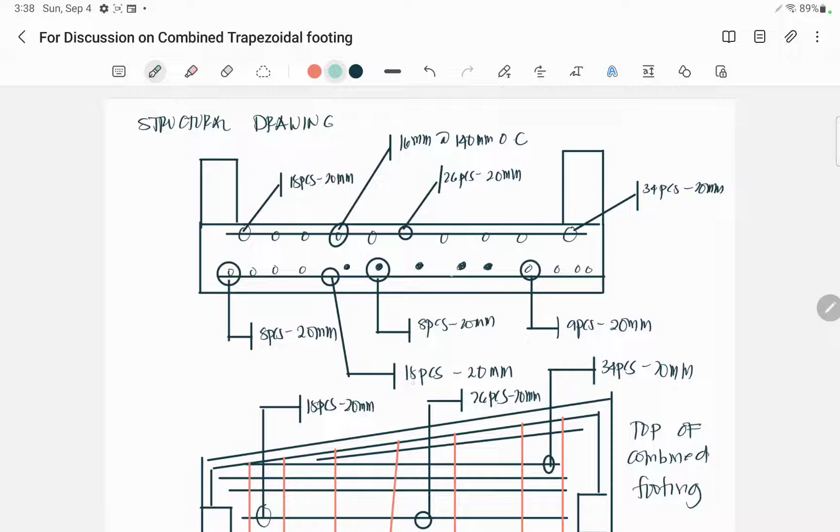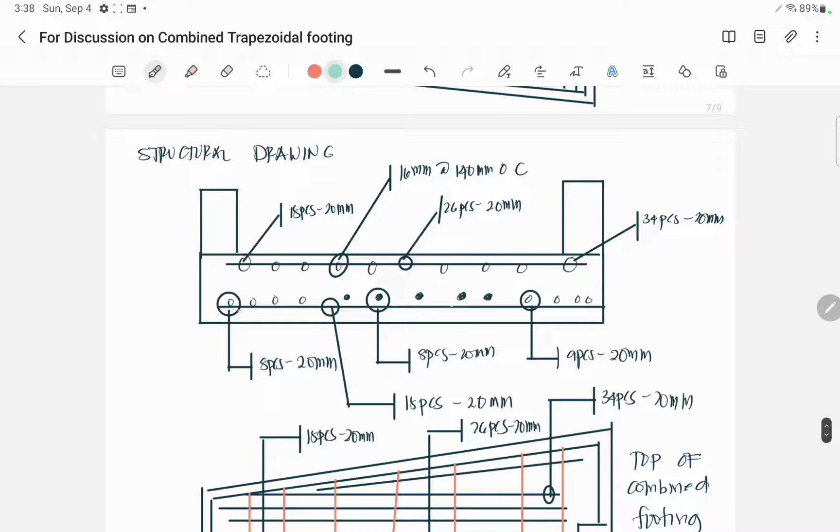So now, for the structural drawing, okay, so you have 18 pieces at the near end of column 1. Then you have 26 pieces at the middle. Then you have 34 pieces at the end, located at column 2. Then you have temperature bars, which is you can provide 16 mm at 140 mm on center. Then since we are not required to put bottom bars, but we utilize 18 pieces because this is the minimum area, right? 18 pieces, 18, 26 and 34, so 18 pieces, right? Then you have transverse 8 pieces. Then you have also 9 pieces. Then I mentioned that at the middle of the bottom bars, whichever is larger.

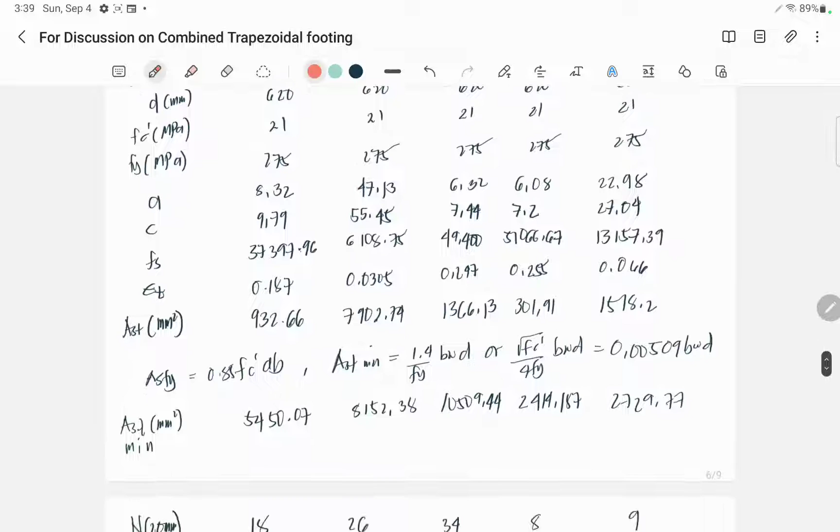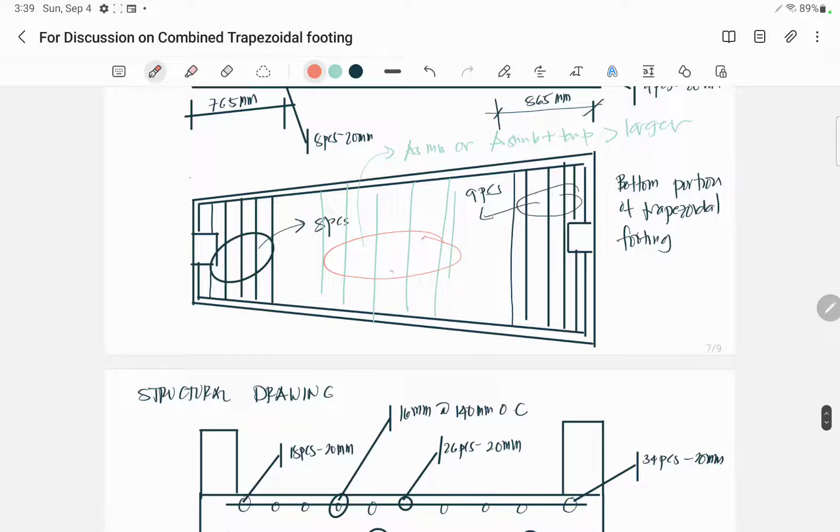So let's check. The temperature is 1390, right? 1390. And for the minimum area at point DE is 2414. Therefore, we will use 2414, which is equivalent to 8 pieces. That's why this one will become additional 8 pieces of 20 mm. 20 mm ba? Yeah, 20 mm. So, you have 8 pieces of 20 mm.

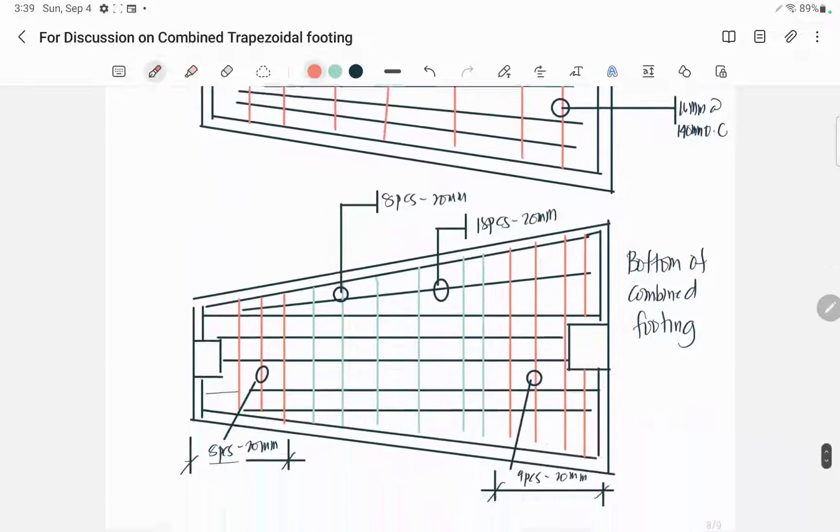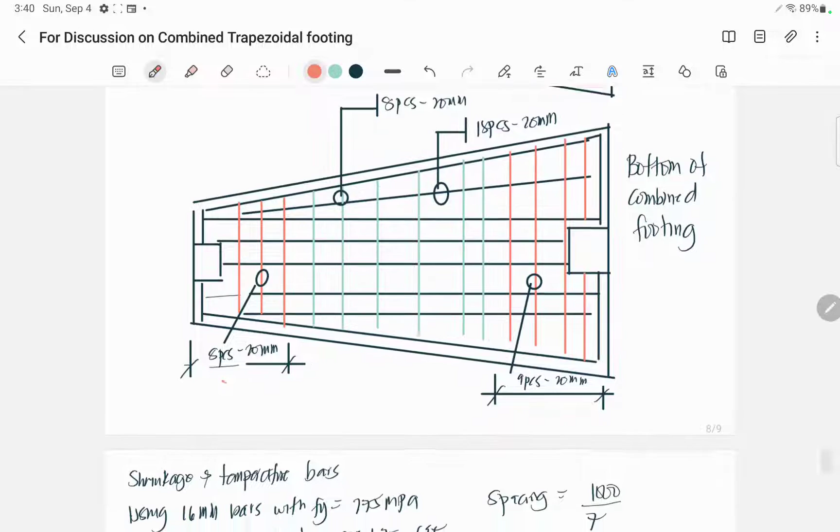So, considering the top of combined footing, you have 18 pieces. You have 26 pieces at the middle. You have 34 pieces at the end. Then you have a 16 mm space at 140 mm on center for the temperature bar. Then for the bottom of combined footing, the code requires us to use 5 pieces at point D, or located at D, or transverse direction. Then 9, then we provide 8 pieces of 20 mm. And of course, the bottom bar for the bottom of combined footing is 15 pieces.

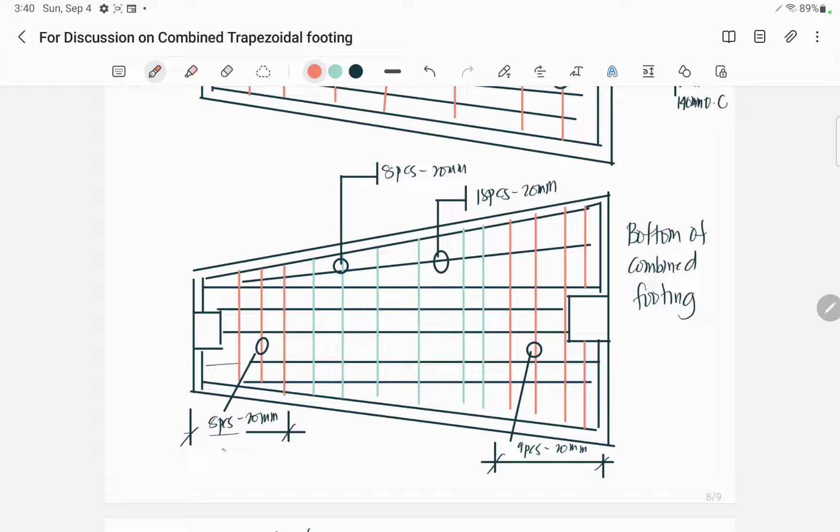So our structural drawing will be this one. Okay? So you have 18 pieces at top, 26 pieces at the middle, 34 pieces at the end. Then temperature bar of 16 mm at 140 mm on center. Then 5 pieces at transverse direction, 9 pieces at the transverse direction at column 2, and at the middle, 8 pieces of 20 mm. Okay?